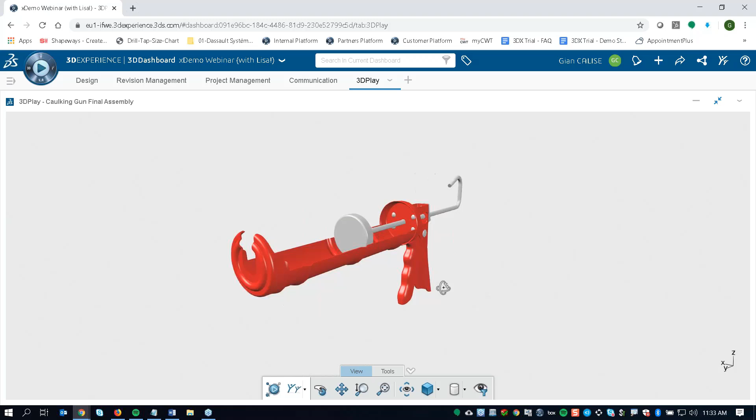Excellent. Well, thank you guys for introducing yourselves. And maybe, Gian, you can share your screen and we can talk a little bit about what we'll be going over. So here you can see on the screen now a previous data set that we've used, the caulking gun demo. If you've tuned in previously, you might have seen this, but it's okay if you haven't seen it before. We're just going to look at the side of project management today and explain the capabilities of project management on the 3DEXPERIENCE platform.

There are a lot of parts, especially when you're working together in an engineering project like this. There's a lot of moving parts, a lot of moving components, a lot of tasks to be assigned. And you know what? Somebody's got to take control. Somebody's got to be the project manager. And that is why we've brought Lisa on with us today.

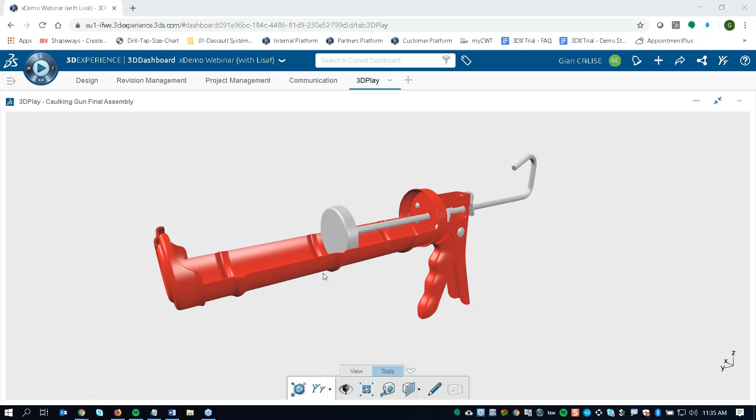Perfect. Thank you, John. So yeah, like John said, I'm going to turn off my webcam. We're going to be using our previous model here, our caulking gun that we did a couple weeks ago. We made this part in xShape and this part in xDesign and assembled it all. So right now we're looking into a 3D viewer called 3DPlay.

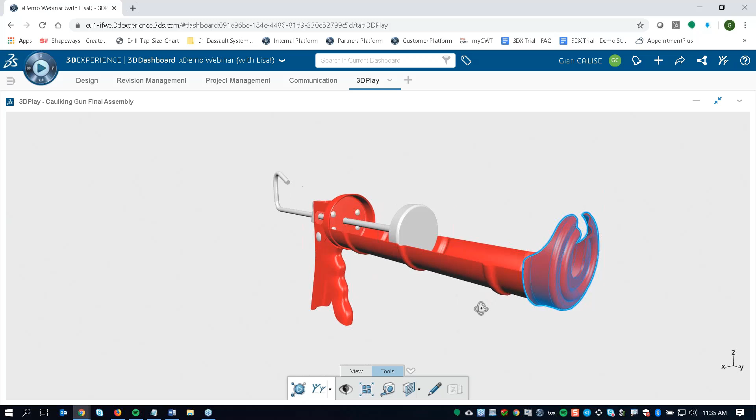And this is one of the primary ways that we're allowing everybody in the organization to do their job from within the platform, because our project manager on this project, Lisa, doesn't actually need access to the CAD tools to get into our model and look around, because everybody who has access to the 3DEXPERIENCE platform gets 3DPlay, this viewing application, by default.

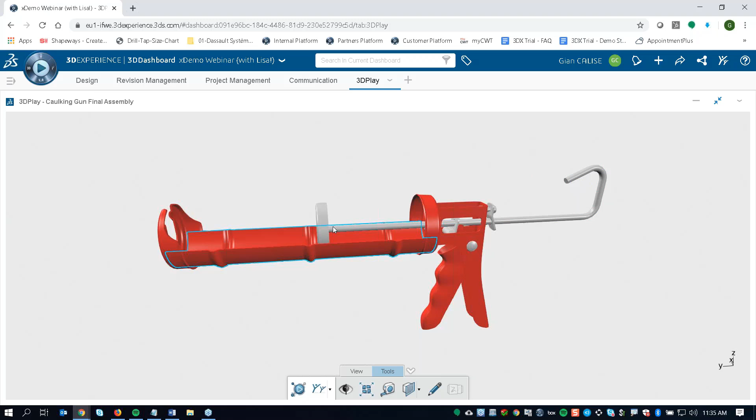So that's pretty great. But in this case I am acting as a design engineer, so I can jump over to my design tab. And I've already pulled this up in xDesign here. So before I make sure, I just want to go through my collaborative tasks. Right now we're looking at one of our ENOVIA applications called Collaborative Tasks, and these are things that have been assigned to me. I'm a part of 2 tasks here. You can see design development and design review and approval.

So John and I are responsible for the development of this design, and that's been in progress as I've been designing this in xDesign and xShape. And for the design review and approval, we're going to wait for Lisa. Once we're done, we hand it off to her so that she can review it and let us know if we're in the clear.

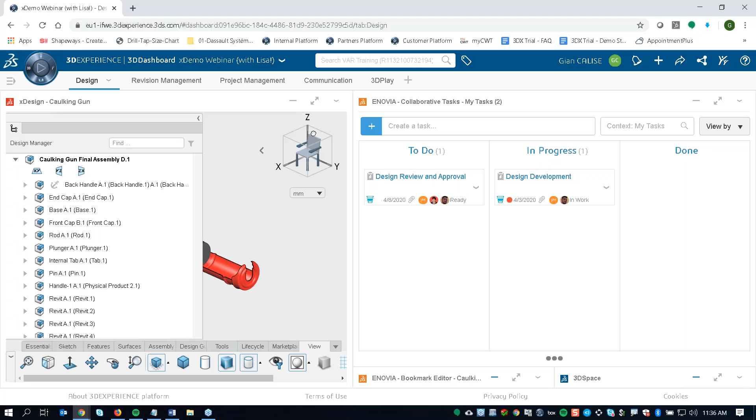So I can go into xDesign, I'll maximize this, and I'll also go into full screen so you can get the full effect here. And I can just visually verify, looking through this model, that everything I think is here is the way it's supposed to be and present. So I'll go over to my lifecycle tab, and I can also make sure that I am looking at the right revision of this part.

So right now I'm looking into revision D. Here's our revision history, which is very useful. We can just drag around the tree. You can see I have plenty of branched revisions here off of different stages in the design process, but this is our final run, revision D, and that's the one that we want to attach to this task.

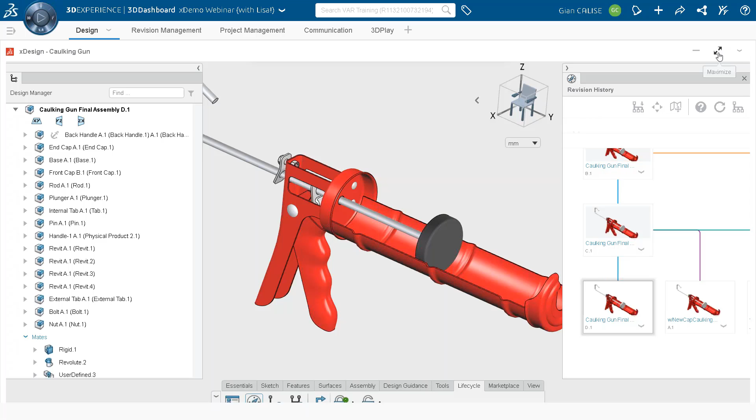So what I can do is I can go to my in-progress task here, and I can attach it as a deliverable. So I can scroll down in here, and you can see here is also the caulk gun specifications. That was a PDF that Lisa attached to this when we first started designing this, so that we would have that basis to go off of.

But now I just need to attach this deliverable, so I could search for the part here, or I could drag it right from my lifecycle revision history right into that, from one application to the other. Super easy. Wow, that's pretty crazy. Yeah, that's super intuitive, very intuitive. And then even more intuitive than that, I can just drag and drop a task that's in progress to done and call it a day.

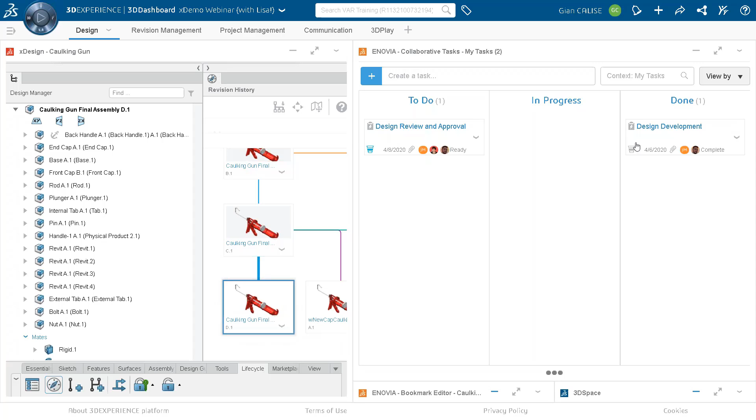The one thing I want to make sure I do before I let Lisa take a look at this, though, is I want to make sure that I promote the maturity state of this part to frozen, so that everybody else collaborating on this project and on the team sees that it's in frozen and knows therefore that it is under review. So I'll make sure that that's frozen. Should have done that before I moved the task to done, but that's okay, because Lisa won't take a look until I tell her to.

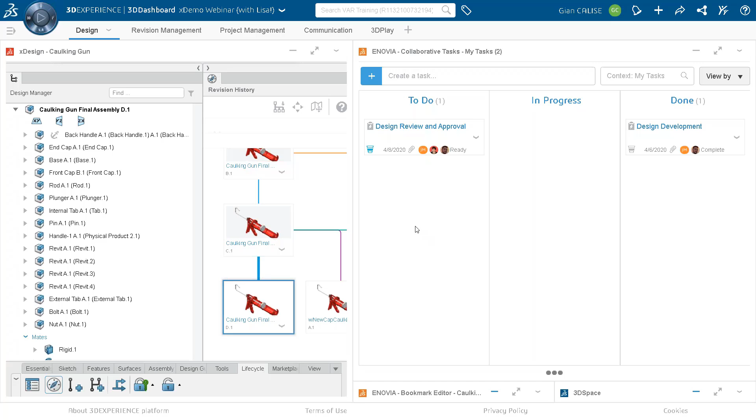And I think we're just about ready to hand it over. So Lisa, go ahead and take it away. Let us know what you think. Thank you, Gian. So real quick, again, everybody's seeing my screen.

As we talked about before, ENOVIA Works is ingrained into the 3DEXPERIENCE platform. My role in this project, working on our caulking gun project, is that I am the project manager. I've got a little different view than Gian had of the data. I look at it from a big picture standpoint. These, by the way, are the exact same tasks that Gian was looking at, but when I look at it in the project plan view, a more traditional Gantt chart type view, I see them with their dependencies, more of a calendar type view, also the milestones there.

One thing I do want to take notice of is that I got a notification. So besides just seeing that the task is complete and it's gray, I also got a notification. It showed up live as well; when we switched the screen over, I saw it pop up, but you guys just didn't see it because it was a quick transition as Gian was working. So I get constant feedback as to how things are going with the project. This is more like project execution; it is the plan, but also executing against that plan from that standpoint.

So when I look at the tasks as a project manager, I can see in that Kanban type view that the design development is done. I can use that same methodology of starting the design review and approval, dragging it over to in progress. And again, because it is a single system, everything is feeding back to the same system, you can start to see that it's moved now to being started. So it starts to fill in that dark blue type color.

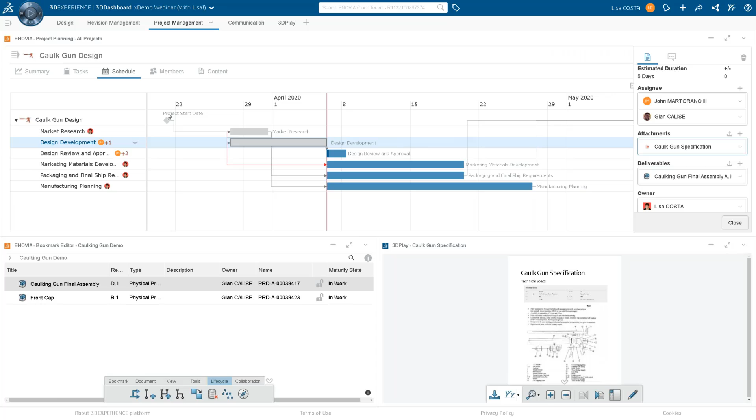A couple things I want to cover. Gian mentioned briefly that on the design development standpoint, that task had an attachment, which was the caulk gun specification. So that's what we're looking at right here. This is that same viewer that Gian was looking at. So I've got the input, which is the attachment that I handed off to our design team that they worked against, and then we have the actual deliverable.

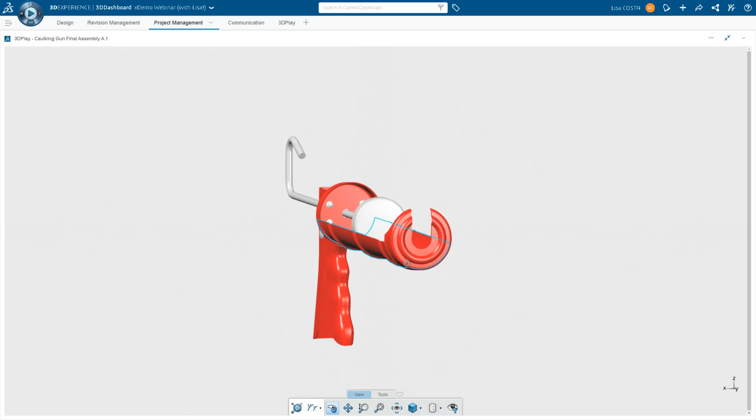So as the project manager, I can grab that deliverable right from there. I don't have to leave, I don't have to search for it, I can just grab it from the task, and I can use that viewer that we were talking about; the enterprise, everybody else in the company has access to start taking a look at this design. So when I look at it, this is what we planned on doing. Gian and John have done everything right.

But as a victim of circumstance, like many of us are now, things have changed and we actually need to modify. I know the original specifications called for a smaller opening, but industry has changed the nozzle specifications, so we are going to need to make a change. So this viewer tool also has the ability to do some quick markups, kind of informal type markups. By the way, I don't want to underplay the ENOVIA Works functionality.

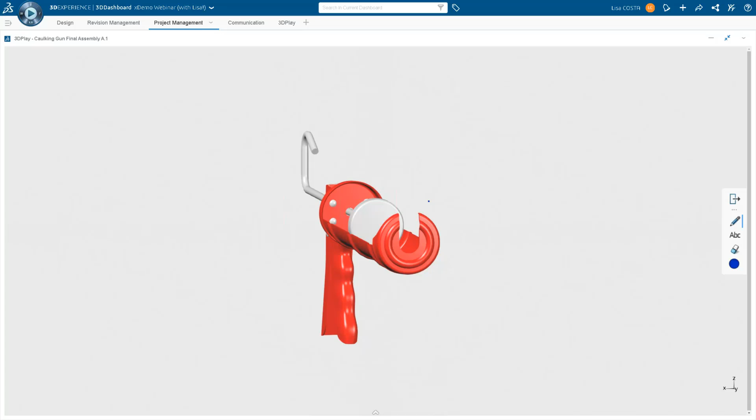We do have formal markups that can be done, as well as changes, deriving and issues and things like that. But for today's purposes, we're focusing on project management and the collaboration tools that we have. So I am going to do that simple markup. I'm going to make myself a circle here, and I'm going to write that.

Turn it into a nice circle. Didn't it? I love the way it cleans it up. Makes even the sloppy stuff look neat. So makes you an artist. That's right, because God knows I'm not.

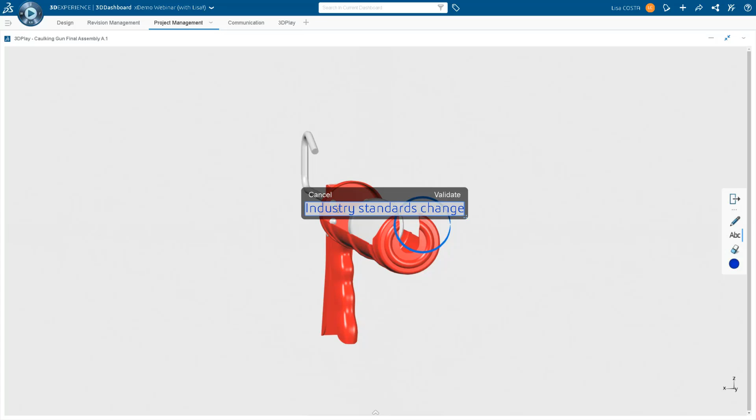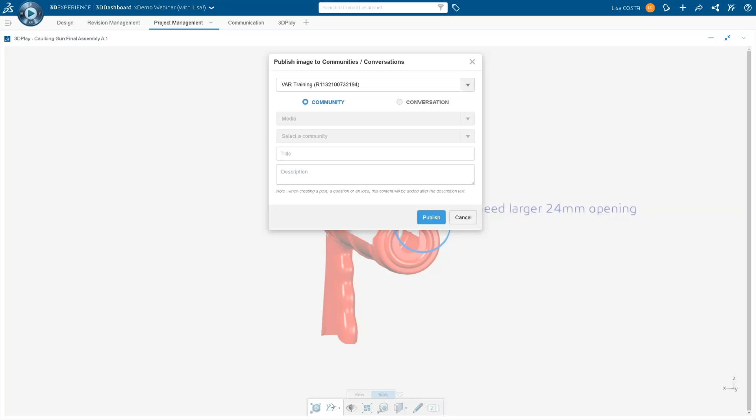Need larger, 24mm opening. I always talk to myself when I type, just to clue you in on what that is. So now that I've made my markup, I have that ability to make a markup real quick. And what I'm going to do with that markup is post it to our community. So again, that collaboration, from a standpoint of the team I'm working with on the caulking gun development, I'm going to say

Nozzles change. Can't type. Nozzles change, and so do we. Need change per note. So I'm going to publish that to our community. So again, working from my dashboard, I'm able to access that viewer, make that simple markup, publish it to that community. That's our collaboration tool for doing that.

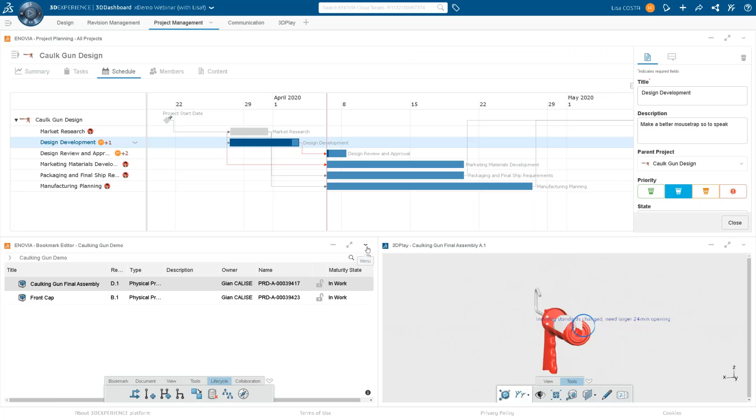So now that I've done that, I have a couple other things that I want to do, keeping in mind that we are still feeding off that same data. What I'm going to do for this task, just to show you there's multiple ways to do this, is push that particular task back to in progress. So it's going to show up in the bucket for Gian as things to do. I'm also going to come back down here and refresh my tool here.

And I can use that same lifecycle tool. Before, we saw Gian using the lifecycle tool right inside of his CAD application, right inside of XDesign, which is the 3D creator role. I'm able to enact it based on my role, based on what I'm allowed to do. Obviously there's all sorts of ways to slice and dice permissions and access, but in this particular case, because I am the project leader for this particular project, I'm going to go in here and

I can actually change the life cycle of that to released. Not released, back to in work. Released is an option if it was right, but because I need that change, I'm going to go back to in work. So big picture, everybody's working on the same data. It doesn't matter if it's a deliverable, doesn't matter if it's the life cycle. Everybody immediately sees those changes.

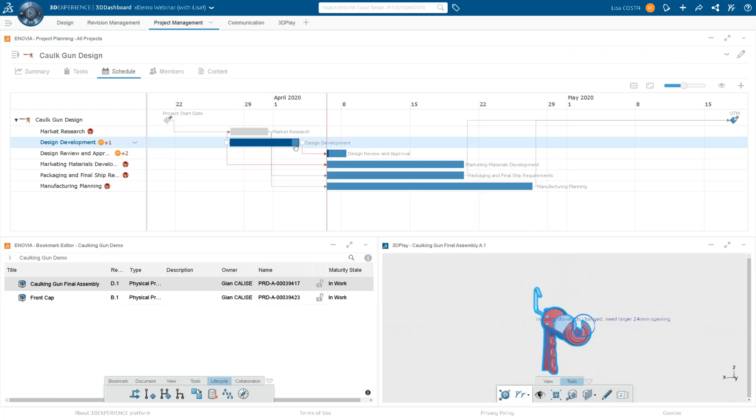So in this case, as far as the design review and approval I started, I'm going to send it back to Gian, and you can see here his design development task is no longer complete or gray, and it's now turned into this dark blue color.

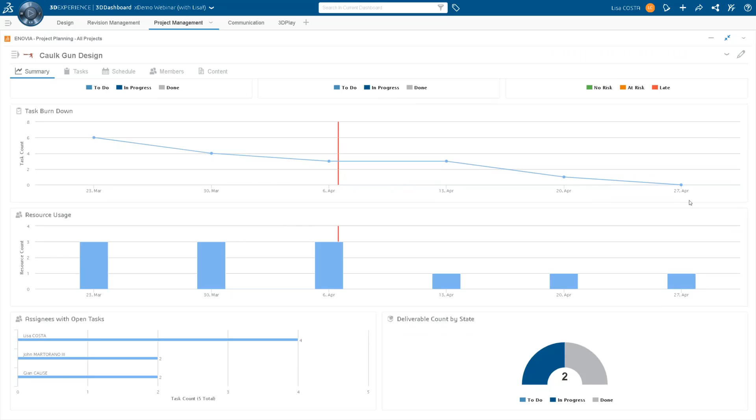Real quick before I pass it back, Gian, sorry, one thing I forgot to cover. When you're looking at the projects, you can also look at a summary type view. I know we've already looked at the tasks and the schedule, but you can also see a summary of what's running late, how many tasks are out, and also a burn down of when we're going to complete this and hopefully wrap this project up on time by April 27th, which is our go-to-market plan.

Back over to you, Gian. Perfect. Thank you, Lisa. Ball's in your court. Yeah. How are you going to handle all this pressure, Gian? Oh, the pressure is on.

So I can take a look right now. We're looking into the community that Lisa just posted this to. I can see her post right here. Her note: industry standards change, need larger 24 millimeter opening, contrary to a previous post I made when we were first researching this project, where we thought the nozzle diameter would be 18 millimeters based on industry standards. But clearly those have changed, so we have to adapt accordingly.

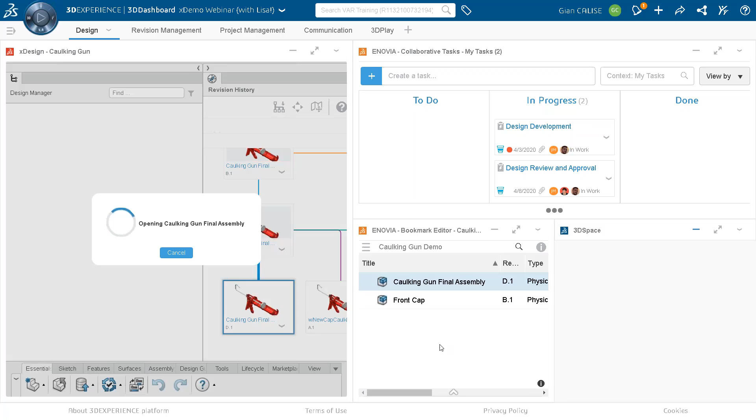So what I can do is jump right back over to my design tab, and I could search for my part up here and drag it into XDesign, or another really handy tool that we have in the ENOVIA suite is the bookmarks. When I search for a part, I can drag it into my bookmarks, and now I don't have to bother searching. I can just drag it right into my XDesign landing page and open it up and start messing around. What's that, John? It's a huge time saver. Oh, big time saver. So I'll turn off these planes so you get a little bit better of a view.

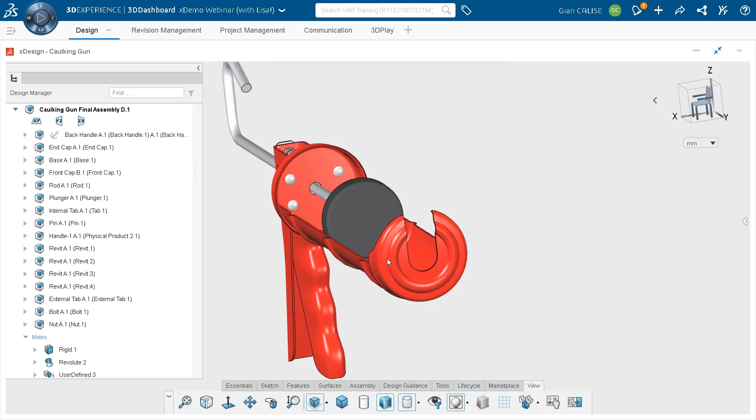And yeah, this should be a very easy change. So we just want to change this diameter in here. So I know that this is the part that I'm going to be using, so I can just give that a nice double click to activate it. And I know it's Sketch 2 driving that feature that's just cutting a hole through this. So all I have to do is just change an 18 to a 24, and that's pretty much it.

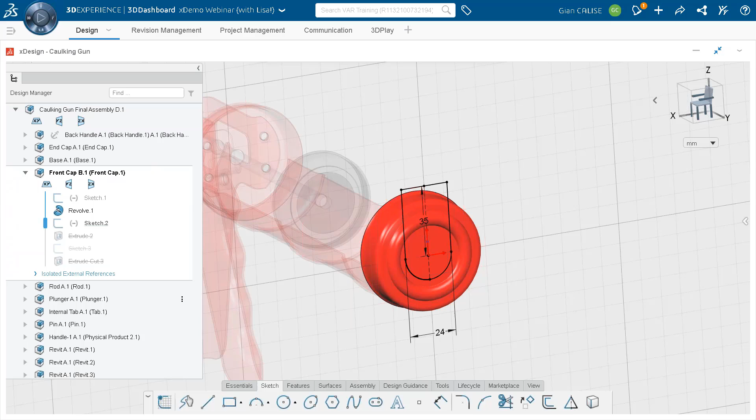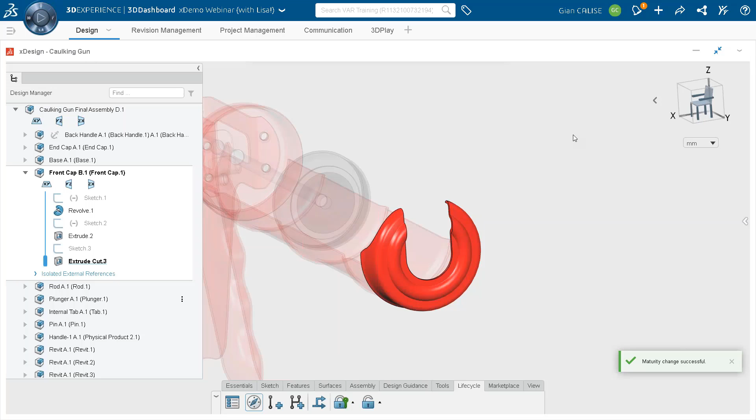So we have our change now. We have our larger nozzle diameter here, our bigger opening. So what I can do is now give this a save, and I want to go back to my lifecycle tab and make sure that I put this back in the frozen state once again, so that once again everybody is on the same page that this is under review, or nobody should touch it, for the time being, per Lisa's instructions.

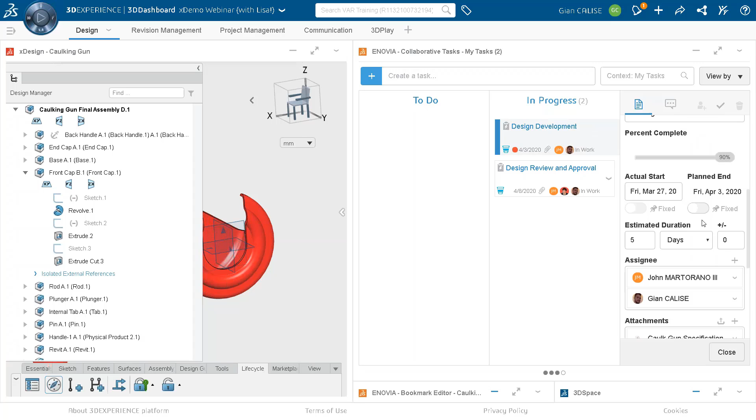So I'll double click just to get back to the overarching assembly view, and it's already telling me to update this, which is perfect. There we go here. And once that loads, that'll be all set to go. And we can go into our design development task here. And if I made a new revision of this component to make that change, if that's the route that I took, then I would have to update my deliverable here.

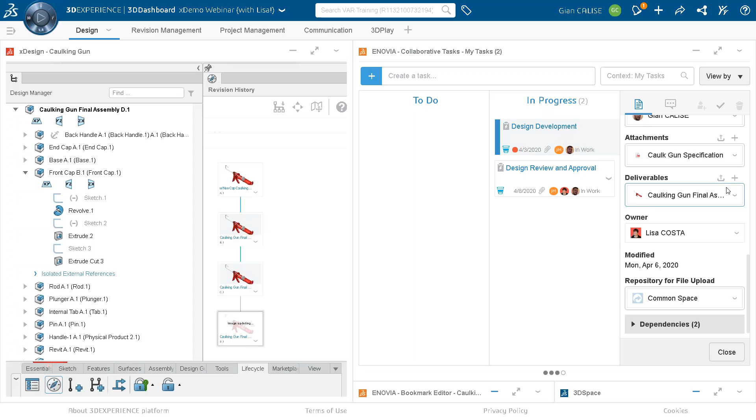But in this particular case, I didn't have any change. I didn't actually have to create a new revision. I already had what I needed. I just needed to update one number. So the data will actually stay the same. And when Lisa opens this once again, she will see the changes that I've made in this part without me having to actually update this.

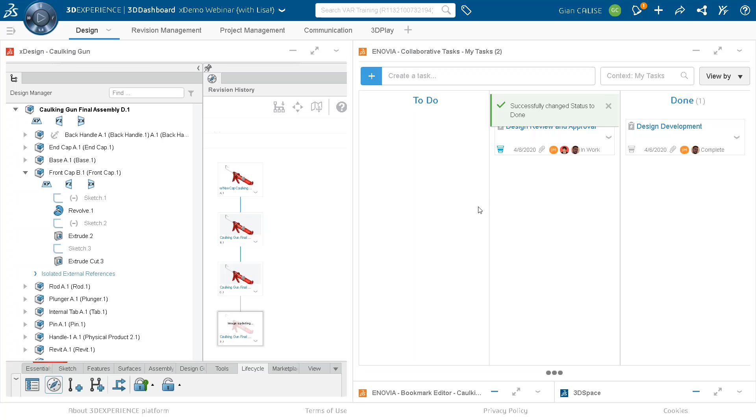So I can just skip right ahead to my favorite part of being in my collaborative tasks app, and that's dragging something from in progress to done. That just looks satisfying. Oh, super satisfying, Gian. So with that, it looks like that was a pretty easy change for me. So I can hand it right back to Lisa at this point.

You can't let him get off that easy, Lisa. Well, unfortunately, he's got good tools, so he's probably going to get off that easy.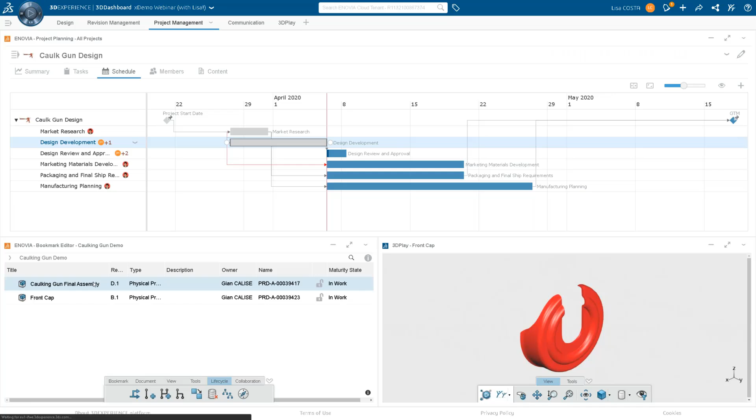So again, back at the project manager level view, I can drag and drop that assembly. So going off of what Gian was saying, from a standpoint of looking at the deliverable, it doesn't change because it's still looking at the same object, right? So we're still working on revision D of this thing, so it doesn't matter. And obviously he has made the change as we saw. So I see that immediately and have that feedback that the design development task is complete again, and I can continue on with our design review and approval.

So when it comes to the actual data itself, I review it. He's obviously made the change that we asked for, and I want to go back to my lifecycle tool here and release this in this case. So we have the ability to put it back into work. Again, you could iterate several times back and forth. At this point, we're going to say that's what we're going to move forward with because our project, of course, is wrapping up soon. So we're going to release that assembly and say that's the one we're going to go to market with.

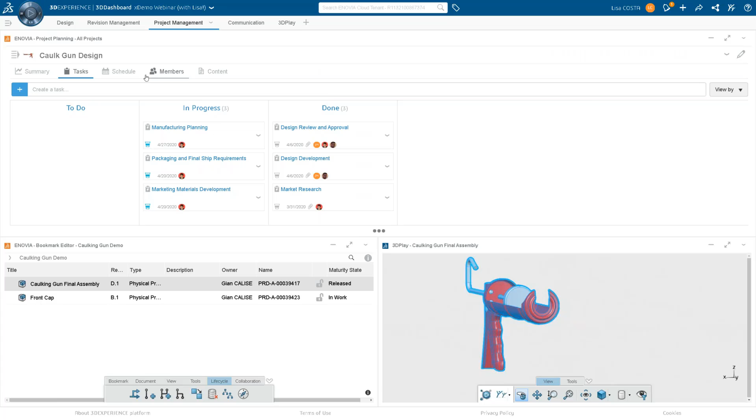So from a project perspective, I'm going to go back here and say basically design review and approval is done. And now when it comes to getting a product out the door, it'd be nice if all that you needed was a design. But as we know, we're going to have to actually get marketing materials. We're going to have to figure out our packaging and shipping requirements and also get our manufacturing planning started as well. So when we look at our schedule now, we've got those other tasks that will now be set in motion with our other team members, or in this case, since it's a team of 3, I guess that's back over to me, huh?

But sounds like it. So yeah, that was kind of a round trip of quickly emphasizing the ENOVIA underpinnings of being able to do planning, lifecycle, the built-in viewer. One important aspect that we didn't mention is any device, anywhere. Lisa, as a project manager, may not use a Windows machine. She might use a tablet, could be on her phone. If travel is actually permitted these days, I could have approved that and done all that right from an app sitting on a train, if those kind of things happened anymore.

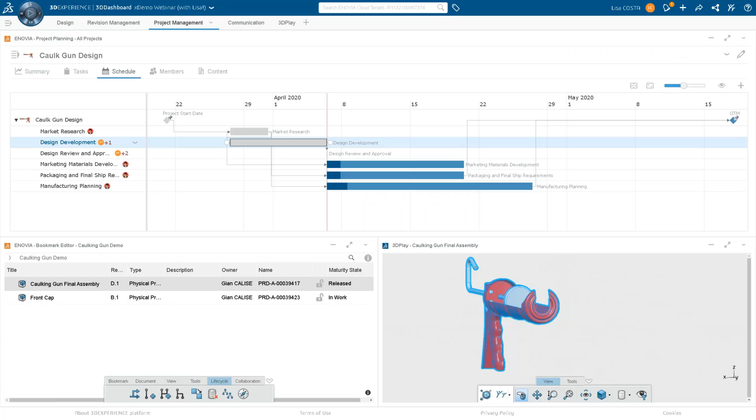So Gian, you started with a task and completed it to current industry standards to create the project, and from there you gave it to Lisa to review. She realized the industry had changed a little bit, so she sent it back to you. You made a quick change and sent it back to her, and you're on your way. So you're able to have freedom in the cloud and just move very quickly, create changes, and move on with the project.